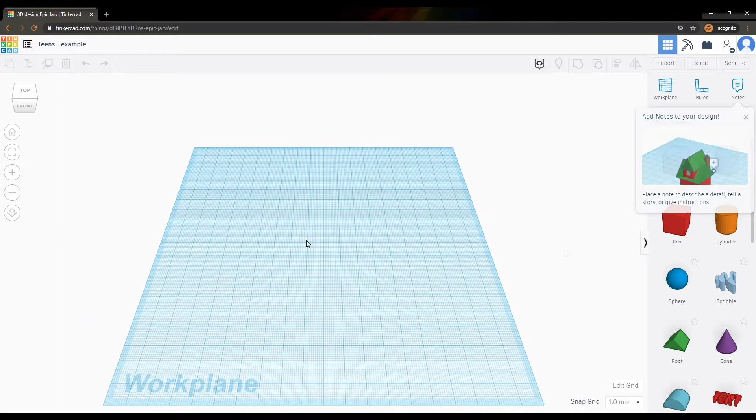On the right side of the page, you will find the different shapes and tools to create your design. For this tutorial, I'll be making a keychain. Starting with a box, click and drag the box onto the work plane.

Once the box is on the work plane, you will see multiple black and white squares around the box, as well as a black cone above it.

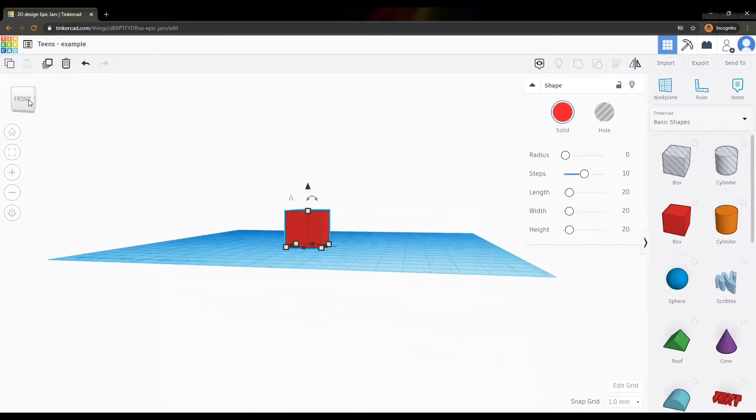The white square at the top of the box controls how tall the box is. Click on the white square and drag it down to shorten the box until it is 2 millimeters in height.

Move the work plane so that you can see the top of the box. You can do this by clicking and dragging the cube or by clicking on the side of the cube that says Top. To adjust the width and depth of the box, we'll use one of the white corner squares.

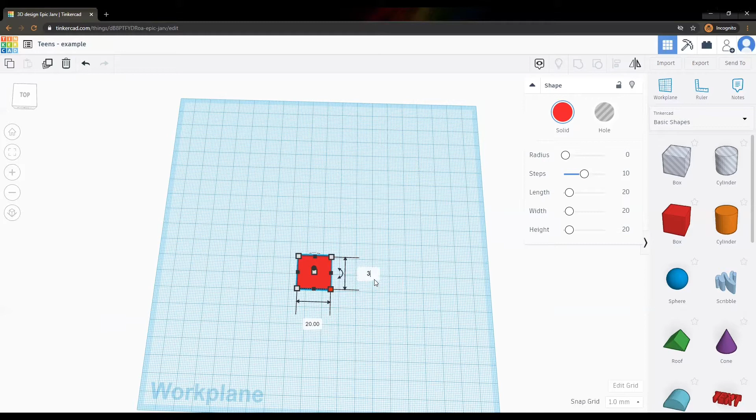You can either click on the square and then click on the number and type the size you want, or you can click and drag the square to the desired size.

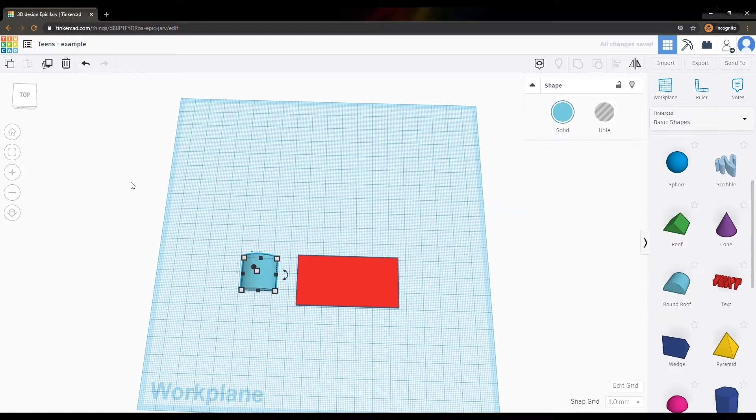Next, we'll add the shape round roof. Click and drag it onto the work plane. Change your view to the left side of the work plane.

Above the shape, there are arcing arrows. Clicking on the arrows allows you to rotate the shape. Rotate it 90 degrees.

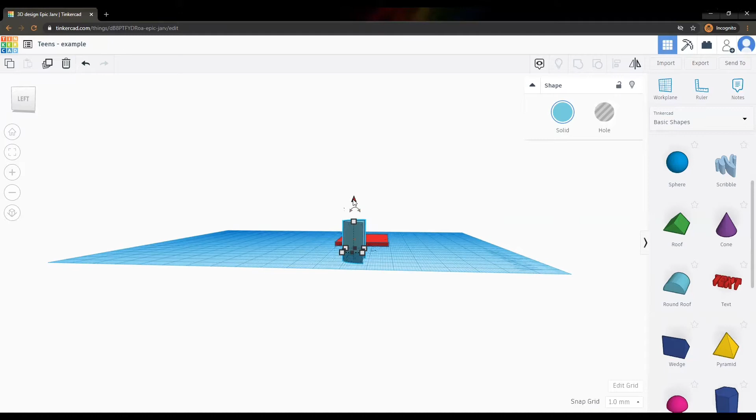Like the white squares, you can also type the number in. Notice that the shape is now partially below the work plane. The black cone above the shape raises and lowers it. Use the cone to raise the shape up until the number in the white box says 0.

Now we need to rotate the round roof shape so its flat side faces the box. This is done using the arcing arrows at the bottom of the shape.

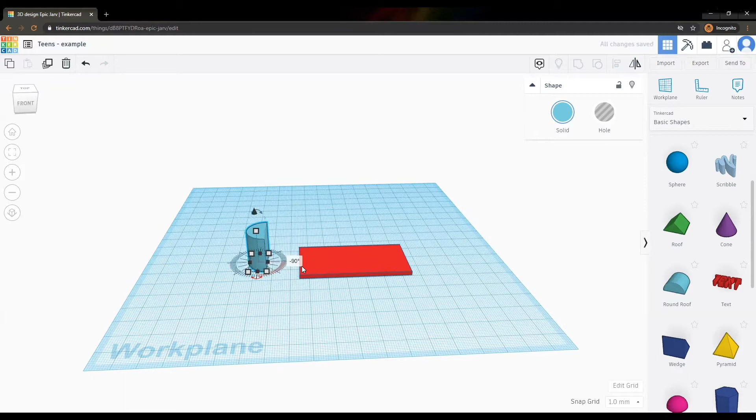Adjust the height of the round roof to 2 millimeters, the same height as the box. We want the round roof the same depth as the box. Click on one of the white squares and change the depth to 30.

Turn the view back to the top. We want to now put the two shapes together.

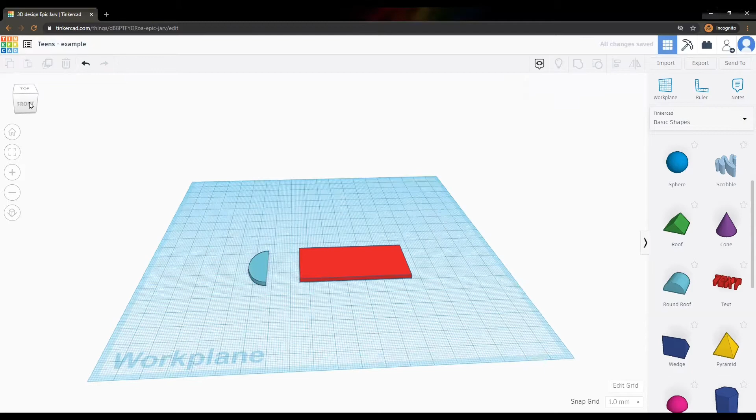You can do this by either clicking on one of the shapes and using the arrow keys to move it, or by clicking and dragging the shape. An easy way to line up your shapes is to highlight the shapes together by clicking and dragging over them. Once they are both highlighted, press the L key on your keyboard. The L key causes a row of black circles to appear.

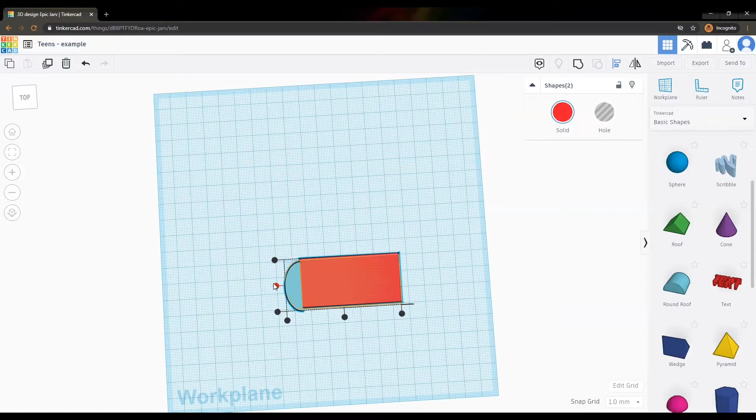These circles allow you to move the shapes together to left, right, or center on all sides. In my case, I am going to click on the center circle so that my two shapes are centered together.

Highlighting the shapes again, I am now going to group them together to make one shape. You will find the Group button in the upper right corner of the work plane area.

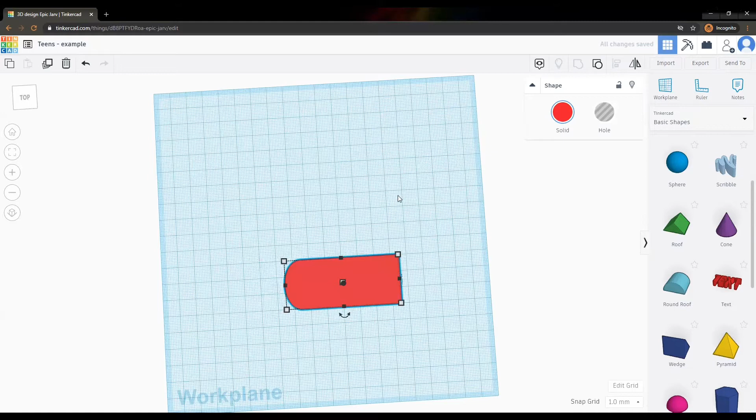Next, let's add a hole at the top of the keychain. Select the hole version of the cylinder shape. You can tell it's the hole version because of the gray stripes.

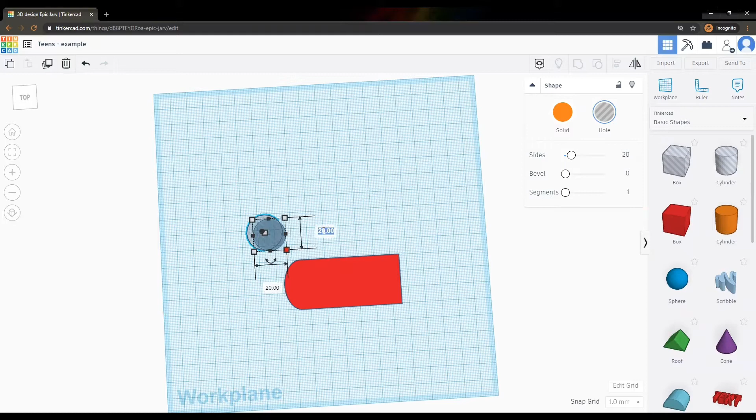Resize the cylinder. I made mine 7 millimeters. Since this is going to make a hole, the height just needs to be taller than your project.

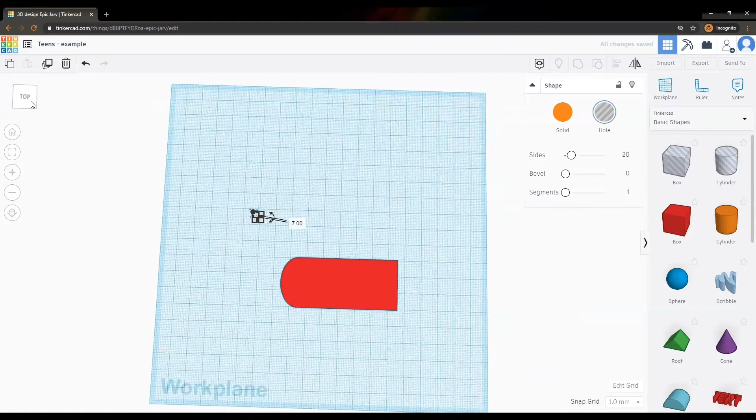Click and drag the cylinder to where you'd like the hole to be on your keychain. I'm going to highlight the shapes and use the L key to make sure the hole is centered.

Turn your work plane to the front. To make sure your hole goes all the way through your project, lower the cylinder so it goes below the work plane. Do this by using the black cone above the cylinder to click and drag the shape.

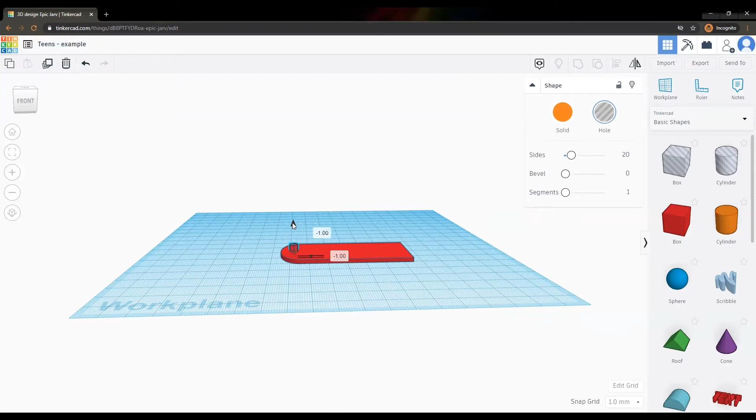Highlight the shapes and click Group. This allows us to see the hole in the project. Clicking the house symbol on the left side of the screen centers the view of the project.

Now that the base of the keychain is done, we can add on to the design. I'm going to use the text shape to add words.

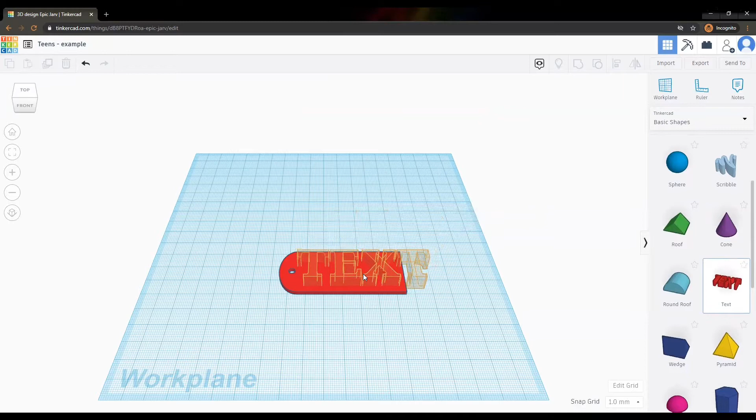Resize the text so that it is only 1 millimeter or 2 above the base of the keychain. You can either resize the width and depth of the text now or after you change the word.

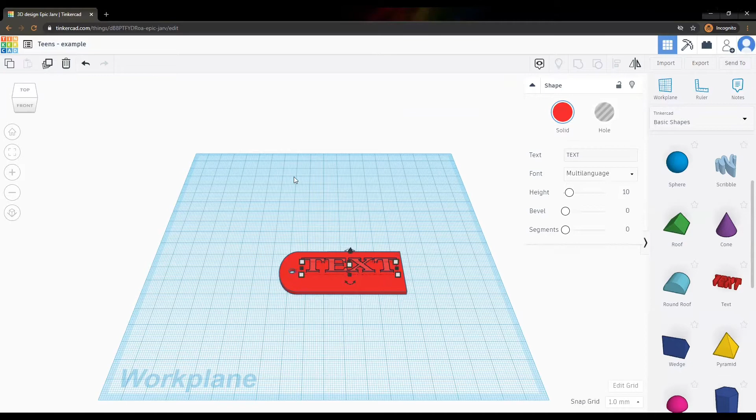To change the word in the text shape, click on the text. In the upper right-hand corner of the work plane, setting options for the text shape will appear. Select the box that says text and then type your new text in.

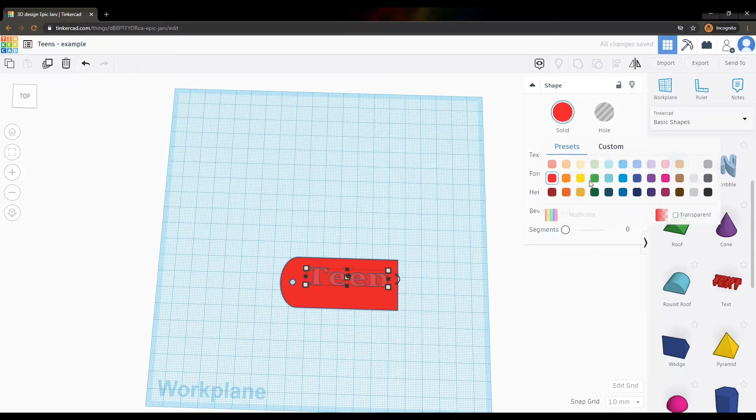So we can see it easier, I'm going to change the color of the text. When your project is printed out, it will be in one color. The color is determined by what material is in our 3D printer at the time.

To add another line of text, you can either click and drag a new text shape onto your work plane, or click on your current text and copy and paste using Ctrl-C and then Ctrl-V.

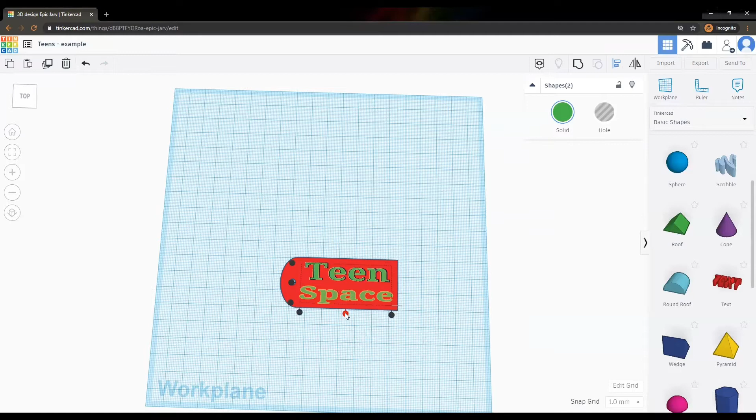When you have completed your keychain design, highlight all your shapes and group them together. This helps prevent any accidental shape movement.

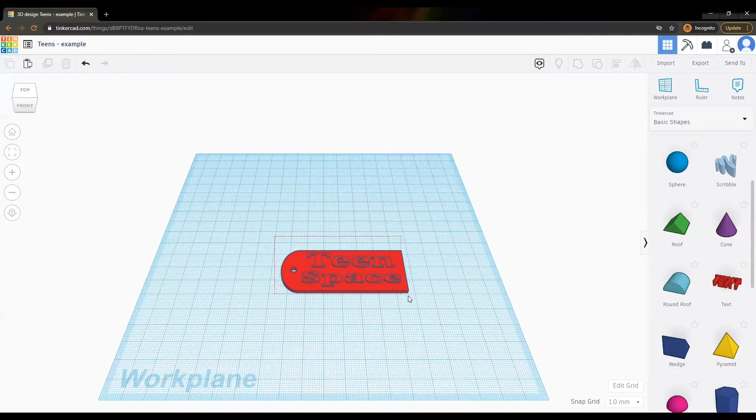Next, I'm going to use our keychain base to make a luggage tag. For this, I'm going to highlight the keychain and ungroup the text shapes from the base. The Ungroup button is found next to the Group button in the upper right-hand corner.

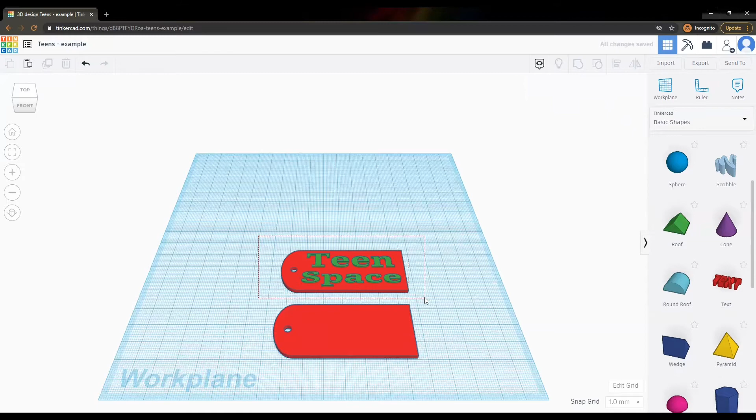Clicking on only the base, use Ctrl-C and Ctrl-V to copy-paste a new base. I'm going to group my original keychain back together before moving it.

I want my tag to be larger than my keychain. I chose to ungroup the hole from the tag base first. Then I make my tag base larger before resizing and centering the hole.

I'm going to group my base shape back together before adding onto it.

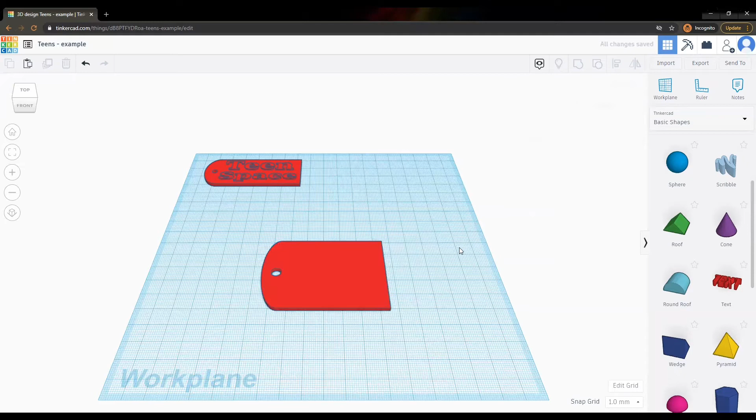Again, using the text shape to add words to the tag. This time I'm going to make the text the same height as the tag base, and then use the black cone above to lift it so it can be seen above the base.

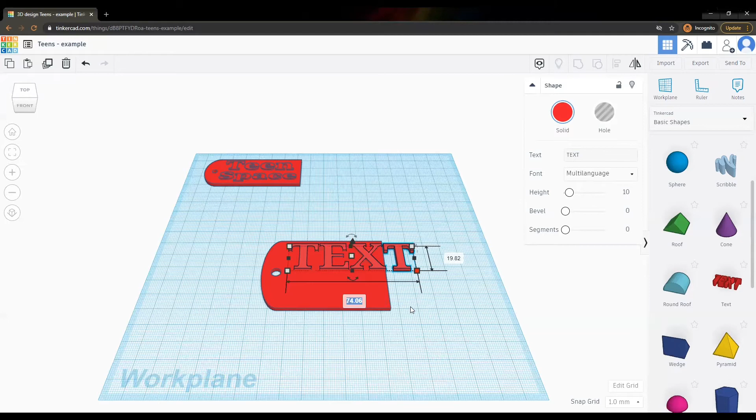Adjust the size and words of the text as we did before. Once you've finished your design, highlight your shapes together and group them.

It's a good idea to check your design from different angles to make sure your shapes are where you want them.

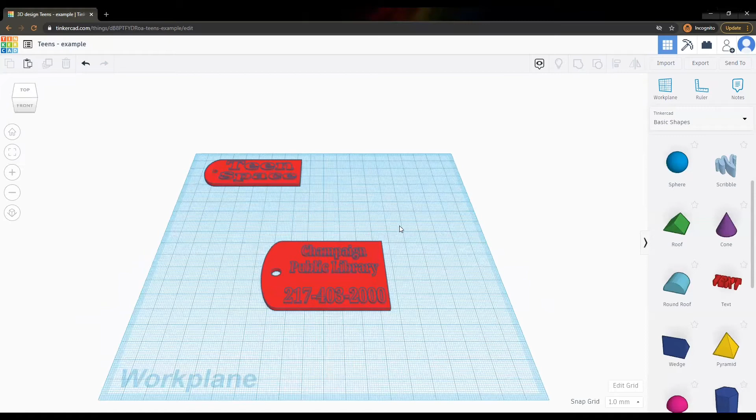Here's another example of a keychain. Normally you would not want all your designs on the same work plane, as it could get confusing.

For the last example, I'll copy and paste the tag base. This time, rotating the base 90 degrees.

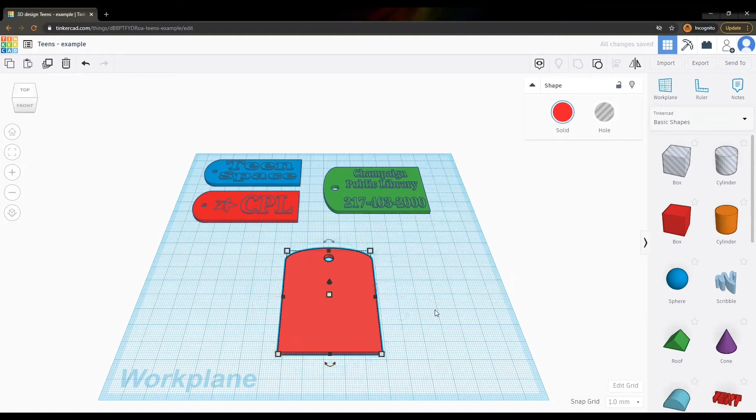Again, I'll use the text shape as we have in previous examples. To adjust the width and depth this time, I'm going to use the black squares. These allow you to adjust one side at a time.

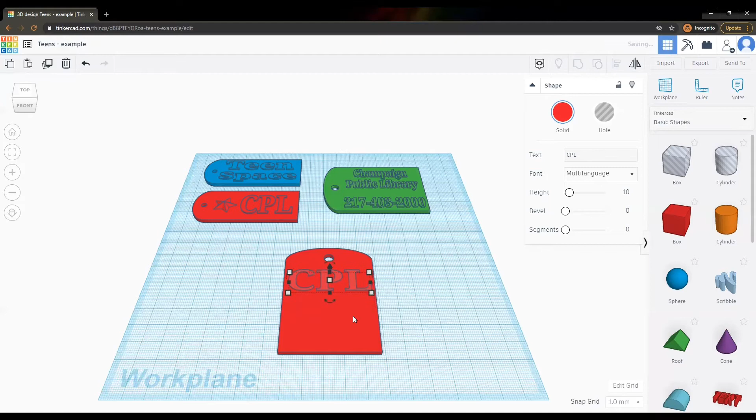You can add other shapes to your tag. I'm going to use the star shape. Resize the shape to fit your tag.

With shapes like the star, the height of the star changes the way it will look on your tag. I shortened the star to 2 millimeters and then used its black cone to raise it to the tag's height.

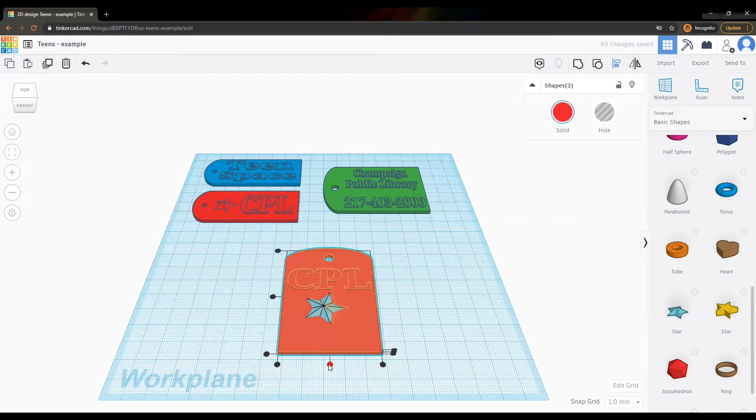Remember, when you are adjusting your design, make sure you look at it from different angles.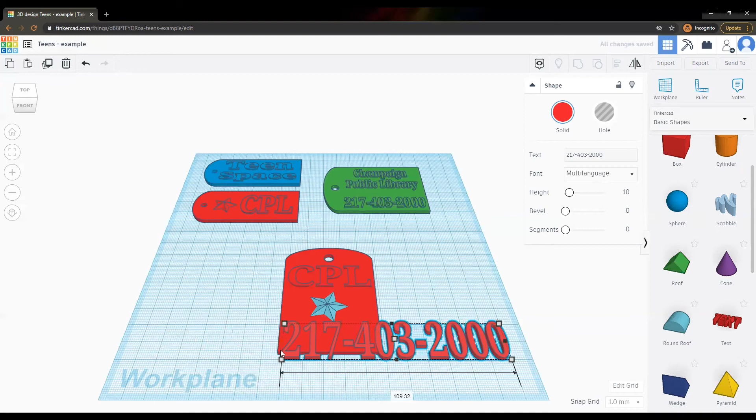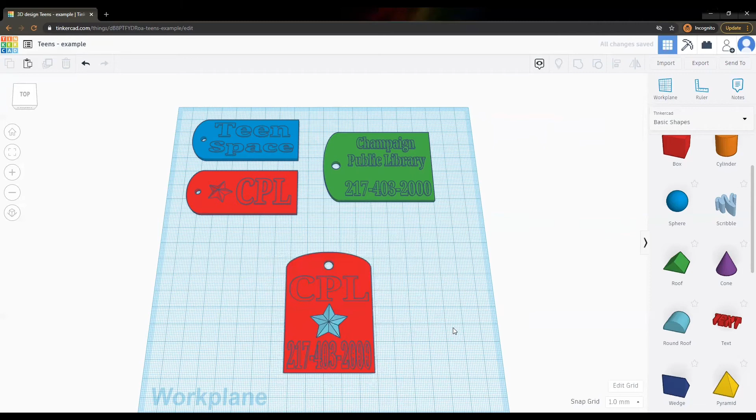You can use the arcing arrows to rotate a shape so it fits its space better. As a reminder, I am centering my design by highlighting the shapes together and then pressing the L key. When you are done with your design, highlight the shapes together and group them.

Now that you've completed your project, here are the steps for sending it for printing. We also have these steps listed out on the Teens page of the Champaign Public Library website.

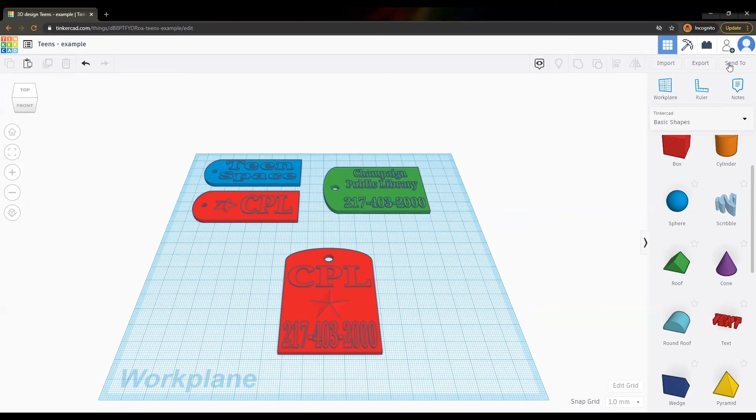When you're ready to send your project to print, click on the Send To button found in the upper right-hand corner of the screen.

Scroll down to the bottom and click on Invite People. Then click on Create Link. If you have previously generated a link for this project, click on Generate New Link.

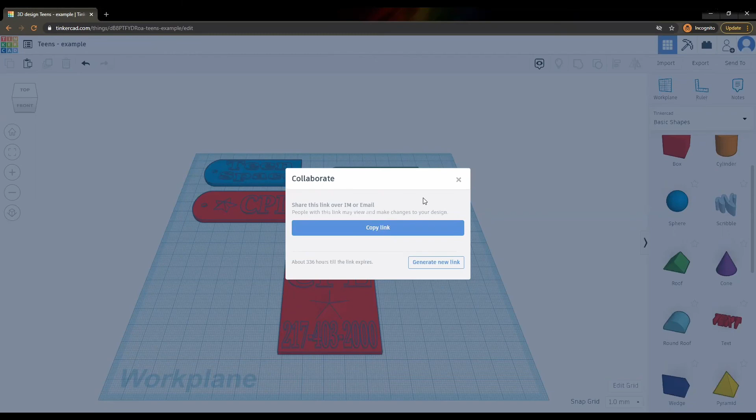Click on Copy Link. The bar should turn green and say Link Copied. Once you have copied the link, go to your email. Paste the link in your email. Please make sure your name is in the email before sending it to teens@champaign.org.